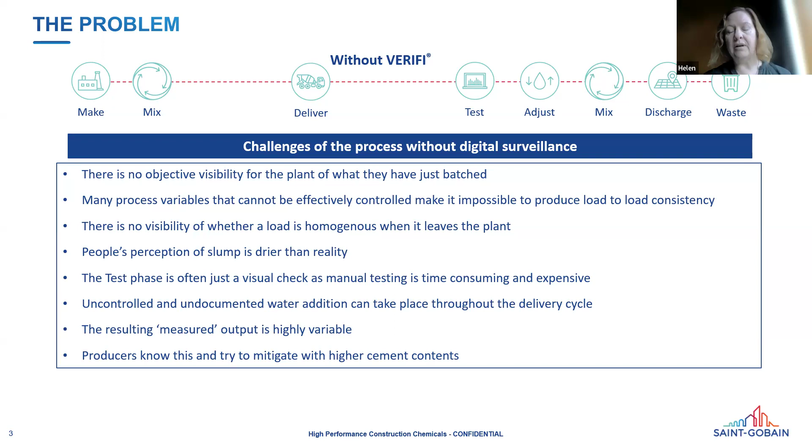The resulting measured - I say measured, it's not really measured - is highly variable. Producers know this, and they try to mitigate these issues with higher cement content. But as we all know, cement is very expensive. It's also got a high carbon footprint, and we all need to be looking at ways to reduce it.

So essentially, what does this variation look like? We can all imagine, and some of us have actually experienced this variability, but without objective data to highlight it, it's difficult to manage and improve.

Now, Verifi has a setting called ghost mode. When we install Verifi on trucks at a client, we typically run the system in ghost mode for several weeks. Essentially nobody knows the system's working, but it's there in the background, quietly recording what's going on. And because nobody knows it's working, they continue to behave and do everything as they have done in the past.

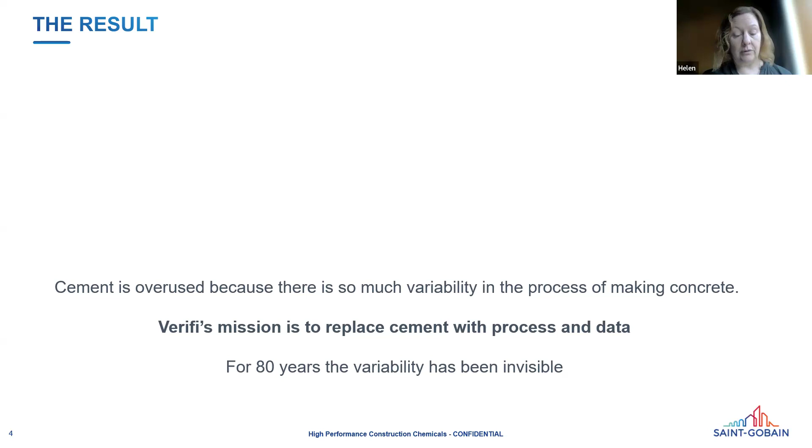What we did was collate the ghost mode data from a year across lots of companies around the world, and put it into a picture. I'm going to show you the picture now. Essentially, it shows the initial slump that Verifi detected for all these loads of concrete, and how it varied compared to the target.

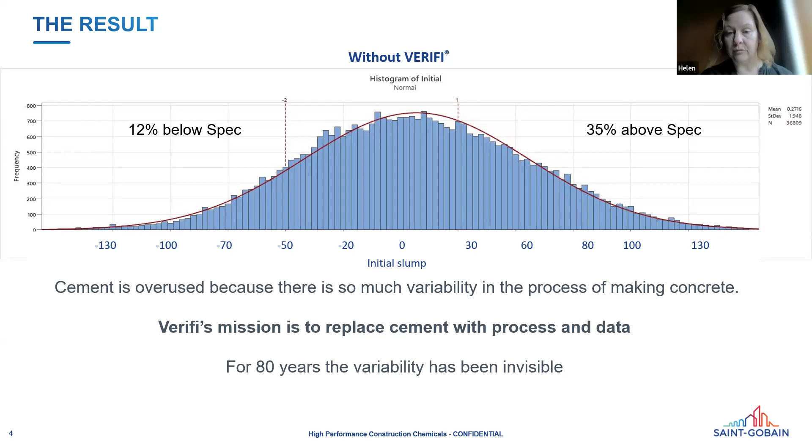Now, Verifi's mission is essentially to replace cement with process and data. For 80 years, this variability has been invisible. Now, with these digital surveillance tools, it is visible, and we can actually do something about it.

This is just a little overview, looking at the challenges I've just talked about, comparing the process without Verifi and then with Verifi. I'm just going to cover a couple because we haven't got a huge amount of time. Essentially, one of the things that currently causes stress and trouble for producers is that they have no visibility of bottlenecks and their causes, and this can hamper productivity. Bottlenecks can come in many shapes or forms.

They can be at the plant, they can be on the journey, they can be at the job site, caused by people's behaviour on site, often caused by sites' insistence on adding water and then not allowing the truck to mix it in properly, then discharging a bit of concrete and deciding it's too dry and adding some more water. All of this is really bad for the concrete, but it's also really bad for truck utilisation.

If you actually got a system like Verifi on your truck, not only can you manage the load on the way to make sure it arrives exactly as it should do, you can also see exactly what's happening. The fleet tracking functionality allows shipping teams to spot bottlenecks before they become a major issue, and for everybody in the process to make informed decisions.

Concrete properties are visible and available to a number of users, so the driver never has to play QC technician, which is actually an unfair responsibility that's often conferred on them in a situation where there is no digital surveillance.

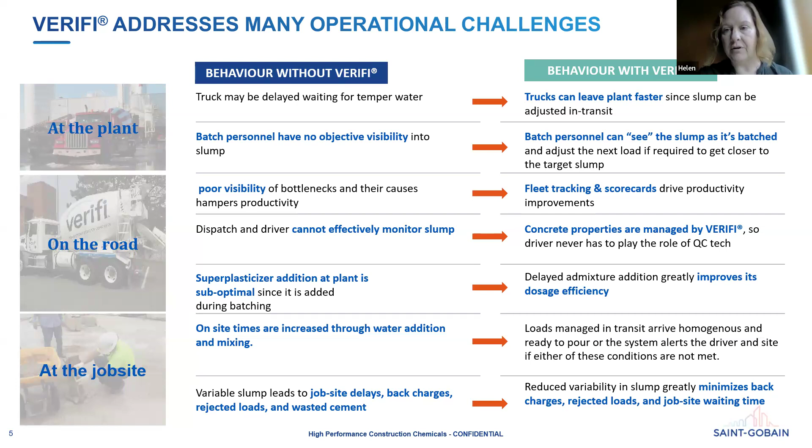So essentially, Verifi allows the production process to be compressed to only the essential steps, and it brings visibility benefits, productivity benefits, and sustainability benefits.

We independently asked the Carbon Trust to independently analyse the sustainability benefit for us, because obviously we can make claims, but they need to be validated. Looking at the data we produced from various of our customers, they have decided—I'm sorry, I can't actually see what the number is, but that number has been validated by the Carbon Trust.

So the little zoom pictures are sitting over it. So it is a significant saving from a carbon point of view.

The productivity improvements also are massively helpful for the whole supply chain, because if you can utilise your resources better, you can pour more concrete, you'll finish jobs more quickly, and you'll not be taking up road spaces, or you'll be able to open networks quicker than you would have done in the past.

And then the visibility, the digital record, it's comprehensive—every single load, all of the events in that load time-stamped from batching to discharge. It essentially means that the producer can demonstrate compliance for every single load of concrete.

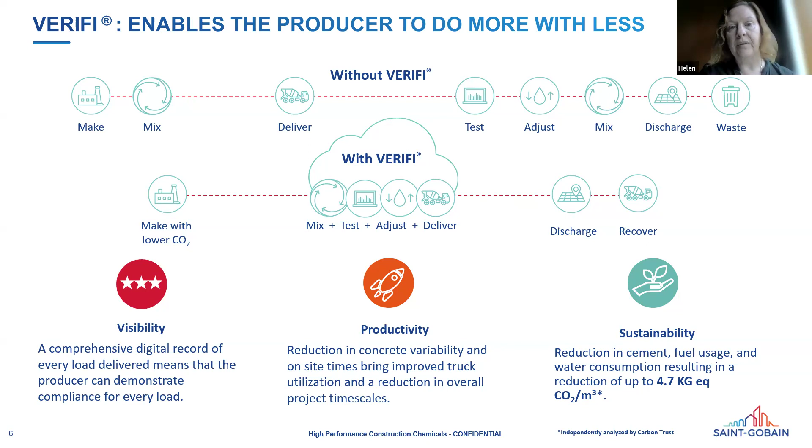So I hear you say, what is this magical system? Essentially, Verifi is a series of cloud-connected sensors fitted to the ready-mix truck that enables the measurement and management of fresh concrete properties. We also measure and record certain truck-based functions.

We're looking at things like the drum revolutions, how fast the drum's going and how many revolutions it's doing. We have a little display on the back of the truck that shows the slump or flow of the concrete at various points in the process. We measure the fresh concrete temperature, the geolocation of the truck, and we know whether the truck's in charge or discharge.

Data from these sensors is used along with information from the batching system and some of our patented algorithms to derive a slump or flow of the concrete.

That information is displayed at various points, both on the truck. We have an in-cab display so the driver can see the information, an external display, and we also have the Verifi hub, where users at the producer and potentially other parts of the process can see all of this information.

The sensors output something on the left-hand side which looks horrible, and only the very clever people in our R&D team understand what that means. But fortunately for us mere mortals, the stuff is all beautifully presented via maps and charts and allows us to see exactly what's going on with the load and where the truck is at any point in time.

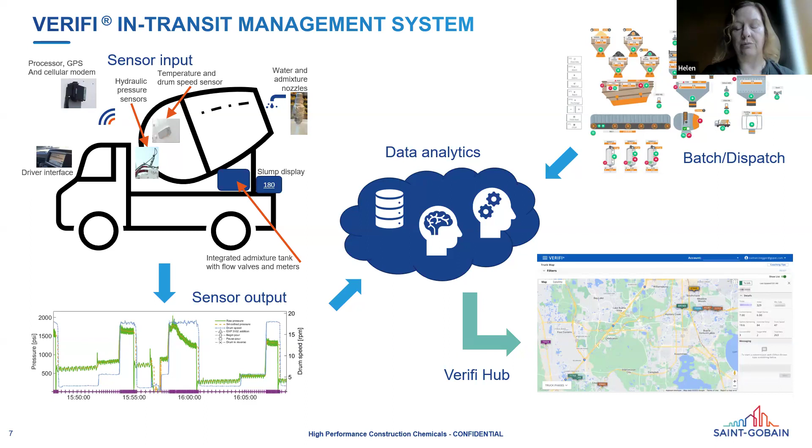Now, what's Verifi's main differentiation? Well, apart from being able to manage the loads of concrete with water or admixture, the system has actually been designed by people with deep knowledge and experience of the ready-mix industry, particularly the ready-mix production industry. We are also very lucky to have concrete science and cement chemistry individuals supporting our team.

We have data scientists and software engineers also in the team, so they're able to take that information and make sense out of it from a predictive analytic and maths point of view. So a system designed by concrete people for concrete people, but taking the best of other innovators and other people from our teams at GCP and Saint-Gobain Construction Chemicals.

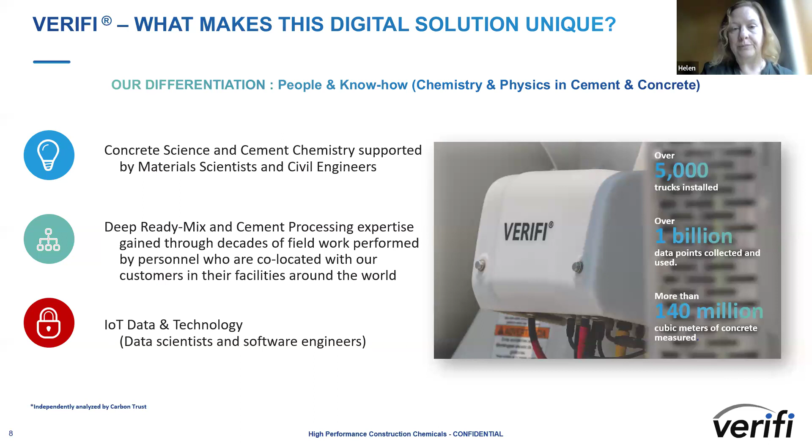Now, essentially, this utilises 2 million cubic metres of concrete. There's going to be 42 viaducts, 66 overbridges, 56 culverts, lots of embankments. It's enormous. And actually, that 2 million cubic metres of concrete doesn't include all the enabling work, so there's actually quite a bit more than 2 million cubic metres of concrete.

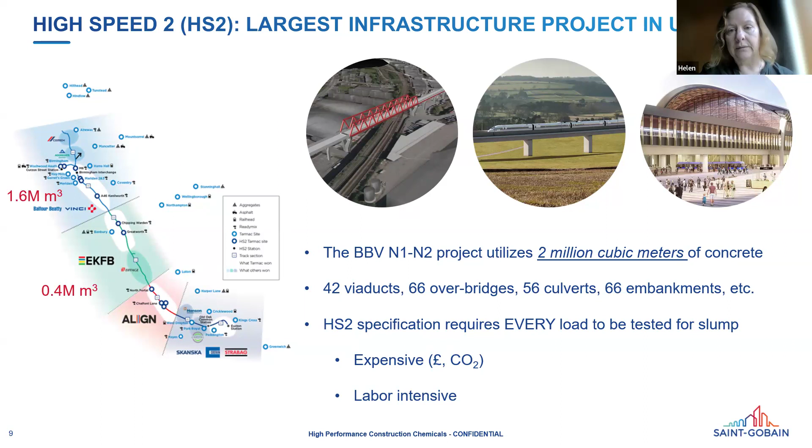And the HS2 specification requires every single load to be tested for slump. Now, that's very expensive. It's quite carbon heavy because you've got technicians running around in vans. It's very labour intensive as well. It's an enormous project, really.

So we decided that it would be great to get the technology on HS2. And we knew it was going to be a challenge because we obviously have a very high stakes project, and we have what in the client's mind is potentially an unproven technology. And actually, you've also got the history of 80 odd years of doing things a certain way.

The slump test, I think, is even older. It's been around 100 years. Raman can probably comment on that. Not because you were there, Raman. But essentially, we thought, well, it's now or never. We've got to try this.

Now, BBV at the time were thinking about this fact that every load needed to be tested because it is enormously onerous and would require an enormous amount of resources. Probably don't even have that number of technicians in the country, to be honest. And they started thinking about alternatives to the manual test.

Around the same time, Tarmac were tendering for the concrete, and at the time Tarmac had Verifi on all their trucks in the UK, and they actually included Verifi in their tender for the concrete supply as a means of differentiating themselves. And BBV were interested, but they were cautious because they'd never seen it in action on a large project.

Fortunately, around that time, Extrudakerb had Verifi installed on their trucks, and they were doing major highways projects along the M6 managed by Balfour Beatty. And so the Verifi team, along with the Extrudakerb team, were actually able to demonstrate the system capability on this project to Balfour Beatty's satisfaction.

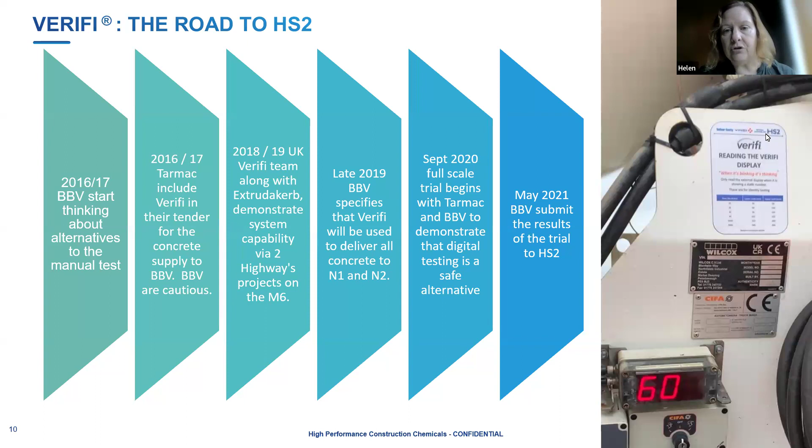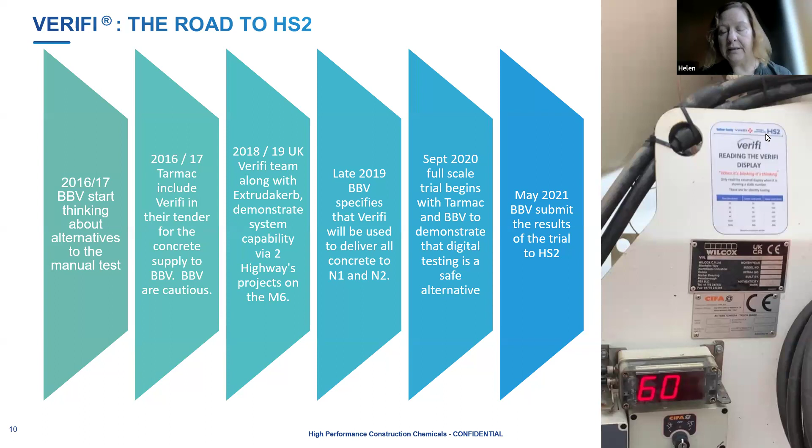And so essentially the trial period was us measuring the concrete and the technicians measuring the concrete. And not just the Balfour's technicians, but some Tarmac technicians were involved as well. So we were trying to make sure that we had a good spread of manual data and we had plenty of verified data. And in May 2021, Balfour's submitted the results of the trial to HS2 for approval.

And the rest, as you know, is history. HS2 agreed to a departure from the specification and allowed BBV to progressively replace manual testing for consistence, temperature and cubes with Verifi via a staged approach.

Now, the staged approach is essentially quite onerous, but it's onerous for a good reason. And it's to give HS2 confidence that what they're approving and what they're supporting isn't actually going to endanger any of the works. So step one, it was to create some families of mixes, which Balfour's did.

So similar mixes are grouped together a little bit like you do with CUSUM families for conformity. And we agreed with HS2 that for the first 1,000 loads of each of those families, we would produce Verifi data and manual data.

And then once everybody was happy with those results, we would move to stage 2, which allowed us to test 1 in 24 cubic meters. So essentially, every third load is tested by a manual technician, and every single load has Verifi data. And that information is compared. And if everybody's happy, we move to stage 3, where we test 1 in 50 cube, and so on, to the end where we're testing the minimum, which is 1 in 200 cubic meters.

Now, there's 2 things that Verifi is assessed on. Is it kinder or harsher than the human being? Is it allowing concrete into the works that the human being wouldn't? And actually, it turned out that Verifi is slightly harsher than the human being.

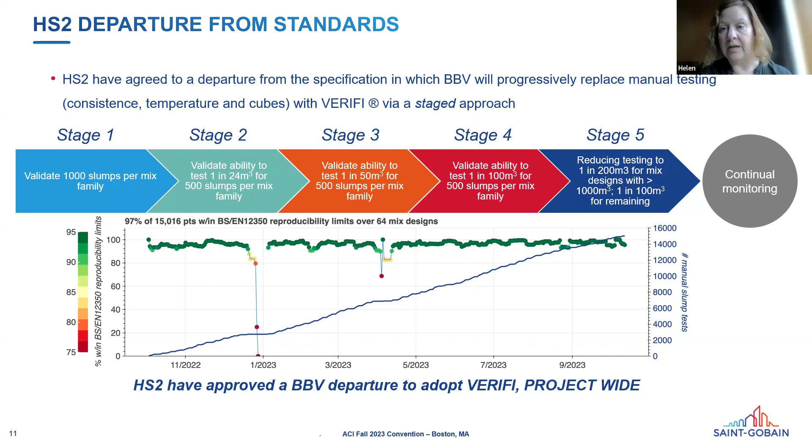So finally, I just want to talk a little bit about—we talked a lot about the benefits for producers, but we haven't talked much about the benefits to the contractor and the client, and arguably they are greater.

So the first one I want to talk about is safety. If you've got a digital surveillance tool in progress, you are going to improve safety because you are reducing the vehicle-people interface. You've not got technicians around the truck as much, and you've not really got the driver getting in and out of the truck as much as they might have done before to make water additions, because the water addition can be done automatically in the cab, if indeed it needs to be done.

Secondly, you've got productivity benefits. If you've got better utilisation of your resources and trucks are not spending as much time waiting around on sites, you will do your pours in less time, and your projects overall will take less time.

Waste reduction. The waste reduces cost and the management time to investigate the causes of the waste, time to deal with non-conformities. And that's a huge benefit, not just because you're saving money not having to buy as much concrete, but because you're saving money not having to have your resources caught up in things that are often not really adding any value.

The CO2 reduction is a benefit for all. Everybody needs to prove that their sustainability credentials are valid and that they can reduce CO2 on their projects. Verifi enables this in several ways.

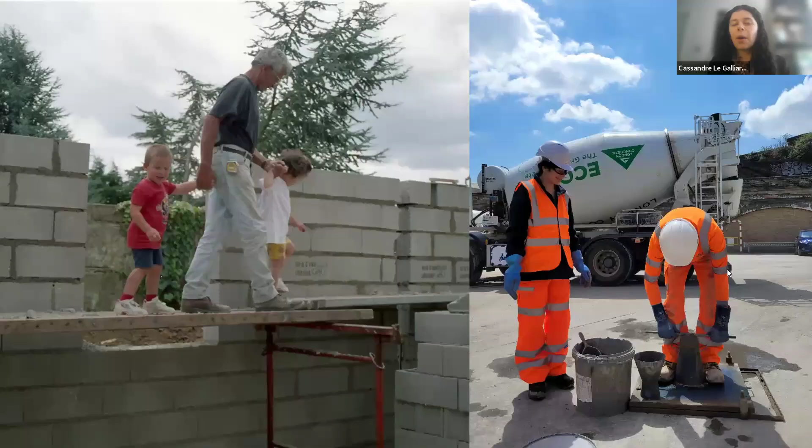First, I wanted to reflect a bit on my position as a woman in the construction industry. My grandpa was a builder, he's here on the picture, and he took me to construction sites when I was young, which is not the best for health and safety. But that was my first taste of the construction industry, and there were not a lot of women at this point.

But I was still interested, and I kept going, and I did STEM. After I joined Aggregate Industries and Holcim, there are still not a lot of women, and we are still missing some role models. But I'm sure it will come with time, and I hope it will improve with time.

So first of all, I will present quickly Holcim and Aggregate Industries, then our net zero strategy, and I will present your carbon report tool, which is our internal carbon dioxide reporting tool, and then I will move towards the environmental product declaration, which is called EPD.

So Holcim is one of the biggest cement manufacturer companies with over 60,000 employees in 70 countries. Aggregate Industries is part of Holcim, it's the UK division, and we are divided in several divisions. We have a ready-mix division, which I belong to. We have a precast division, aggregate division, asphalt division, and we also have one cement plant in Cauldon, which is part of the cement division.

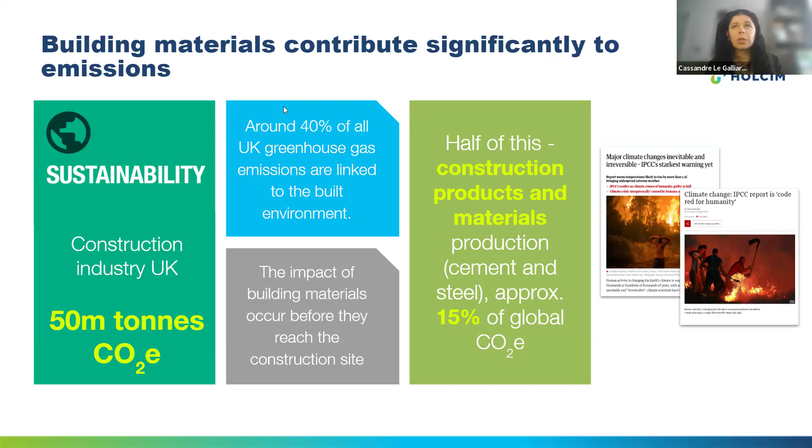We have a net zero strategy, which is science-based targets according to the science-based targets initiative. It's divided into 5 pillars. The first one is climate, where we want to decarbonize. The second one is people and community. Then we have nature and environment, to avoid biodiversity loss. There's sustainable solutions, and finally circular economy, to avoid the scarcity of resources.

In terms of greenhouse gases, it's measured in carbon dioxide equivalent, CO2e. In the presentation I will talk about CO2, but really it's all greenhouse gases. There are 2 types of CO2 emissions: operational CO2 emission, which is associated to an operation or company - within operational carbon you have direct emissions, scope 1, emissions linked to electricity, scope 2, and scope 3, which is indirect emissions.

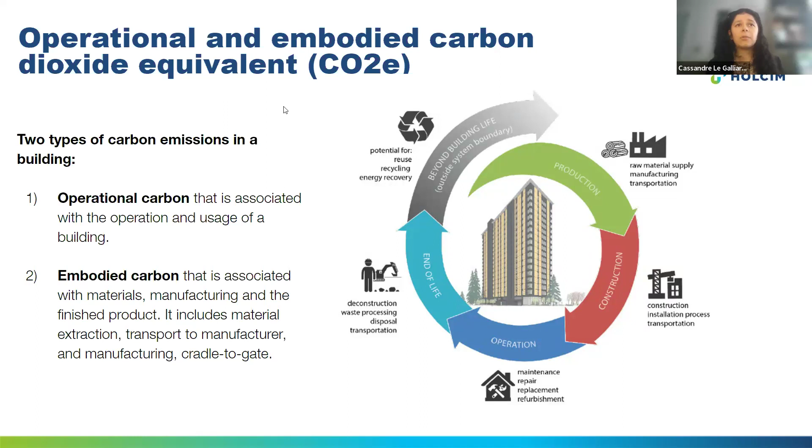And then you have the embodied carbon, which is carbon associated to a product. In terms of life cycle stage, for embodied carbon you measure the carbon at different stages. So you have the cradle to gate, which is A1, A2, A3 - raw materials, manufacturing, transport to factory, and manufacturing of the products. Then there's A4, transport to site. A1 to A4 as a producer is usually what we can measure, but there are other stages.

There's also the use stage, the B stage, the end of life stage. So when it's A1 to C4, we talk about cradle to grave. And the last stage is the recycling stage, the D stage, which is cradle to cradle when it's A1 to D.

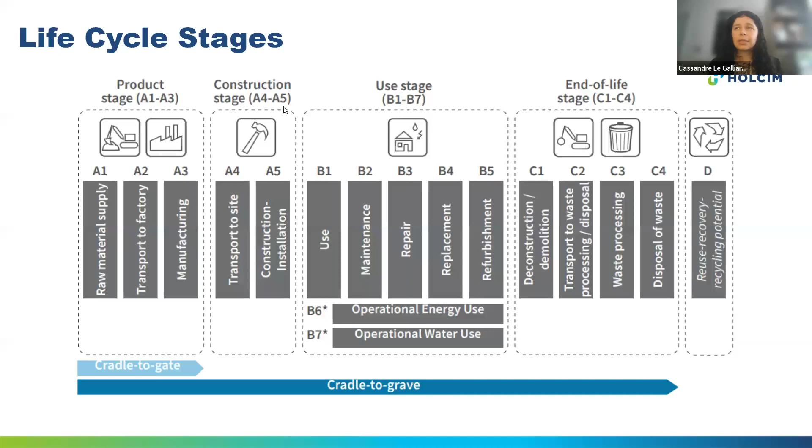And so in Aggregate Industries, we have the EPD, and we have developed first your carbon report, which is a third-party verified automated carbon reporting tool. We developed it, so it's verified by Circular Ecology. And it has been driven by customer demand really - that's why we started developing it, because we had demand from customers to be able to deliver the carbon data of our products.

Before this, we had customers asking for carbon data, usually the more mature customers in terms of sustainability. And we were doing it manually, so it was really labor intensive, and there was a risk of human error when doing it manually. It was not properly standardized on our side, and that's why we decided to move towards a more automated version of it.

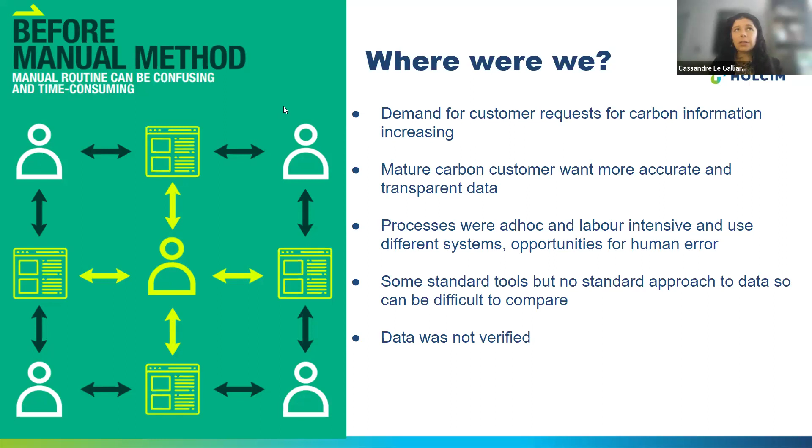So how it works is that it's integrating with our finance platform. So in it, we have the raw materials. Every raw material has a CO2 value. And when we put new raw materials in it, it's flagged until we can put a carbon value.

The transport of raw materials to the plant is added as well, so we know where the materials come from and how they come, so we can add the CO2 value just for the transport, and then the CO2 value will be calculated automatically.

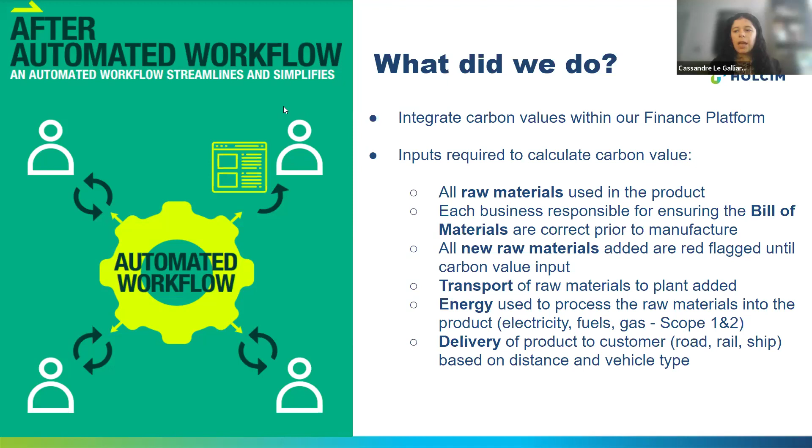Energy use as well is being taken directly from our system, and we know whether it's electricity or gas. We also have the delivery of the product to the customer, so the A4 stage, that we know and it's in our system. And all of this together, combined with the system, gives us a CO2 value for every product that we have. So for example, in my division, every mix in the ready mix division has a CO2 value.

And it looked like this. So when a customer asks us for their report, the carbon report, we deliver a report like this with the different project and the item group, so what type of mix it is, and we have the quantity and the CO2, so A1 to A3 first, so kilogram of CO2.

CO2 equivalent, so it's cradle to gate divided by the quantity, so it's in cubic meters for ready mix concrete. And then we have the A4, which is when it's A1 to A4, so with the transport.

So in terms of process flow, how it works is that a customer will make the demands to their commercial contacts. The commercial contact will send it to one of our analysts, which will issue, will do the calculations. They will do the calculation, and then the report will be sent to the commercial team, which can come back to the customer and give it to them.

And it will also help identify some hotspots and how we can improve it in terms of sustainability, how we can improve the mix, how we can improve the process, and what the different options are. Most requests are turned around in 2 to 3 working days, usually, when we are not overflowed.

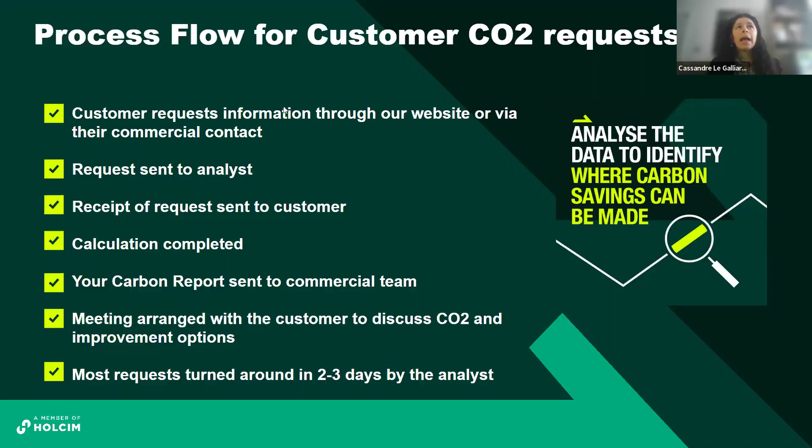In terms of benefits, the main benefit is that it helps with scope 3 for the company and for our customers, so they can ask for the value and then report it as the scope 3 carbon dioxide emission. The calculation follows the main standard EN 15804 and is third-party verified, so people can trust our data.

The value has also been supplied to Causeway for the scope 3 projects which Aggregate Industries have usually been involved in. And he helped us as well. He provided us knowledge and data to start our journey to have EPD, because we understood how life cycle works, which data was needed, and so on. So it was really a first step towards the EPD.

And right now, in terms of development, we have live carbon values for all materials, and the technical team can now advise the client depending on the CO2 value and also the parameters that were there before. And we added recently, I think a month ago, we added the CO2 value to the quote, so the customer can make the decision based on the mix, the price, and the CO2 as well, and other data.

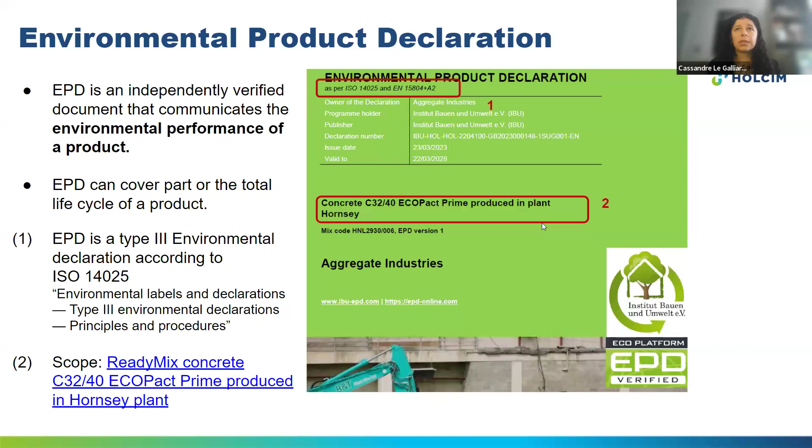And an EPD should be third-party verified. In Europe, it's according to EN 15804 plus A2 if it has been done after 2019. And you can usually see it in the 1 here. So you can look for it, and it's supposed to be signed.

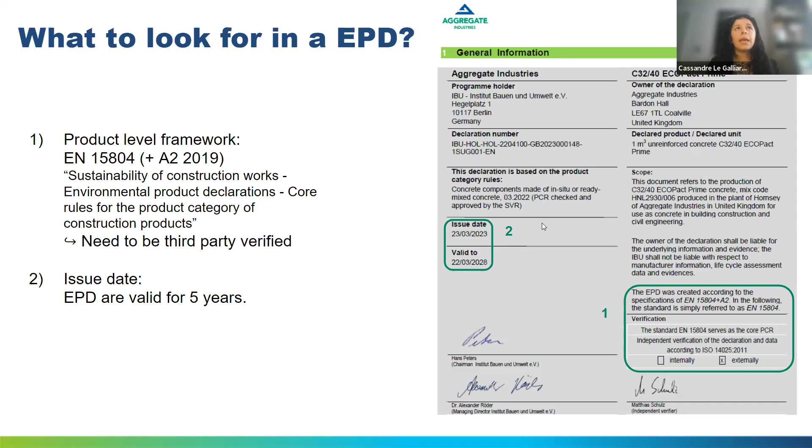And in the EPD, you obviously have the global warming potential, which is CO2, one of the main criteria right now, but you also have impact categories. So you will have, for example, ozone depletion, which used to be really important, the use of fresh water, but also other circular impact categories, like the use of secondary materials and so on.

And it can help the customer decide what they want and what they care about most in their projects. So it's really practical and it's transparent.

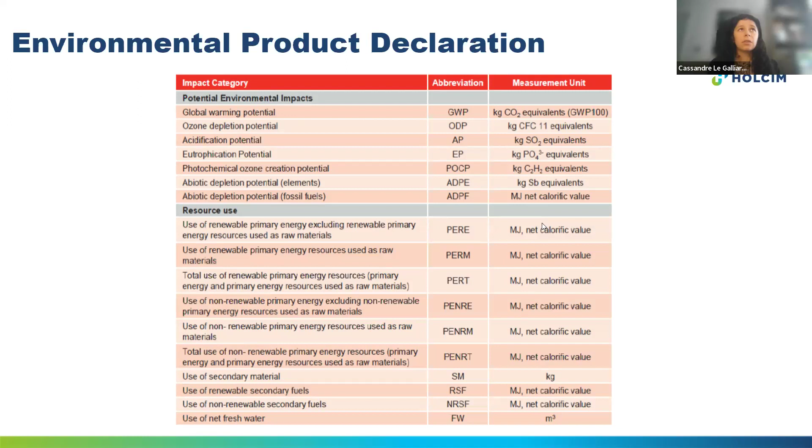So there are several types of EPD on the market. You have industry association EPDs, like for example, in the UK, you have the UK average CEM1 EPD done by the MPA.

So every company that is part of the MPA will give the data for every plant for the cement, and the MPA can do an average and then have the EPD verified. So if you want to know more or less how much CO2 is produced for that cement, you can look at this EPD. It's practical to give you an idea of where you stand.

Then you have individual company EPDs that are plant and product specific, which is the direction we decided to take in the UK as Aggregate Industries. So it's really for one product in one plant. It's the most precise type of EPD you can have.

The process to have them is divided into 5 steps. The first one is data collection, done by the manufacturer. In our case, it really helped that we already did it for our carbon report. Then you have the life cycle assessment done by a consultant, and then they run a background report. This stage takes 1 to 3 months.